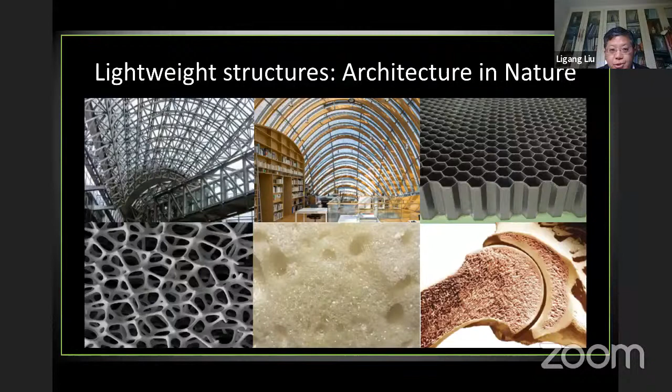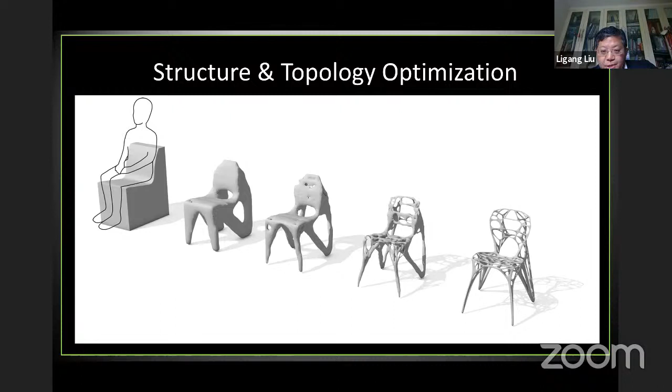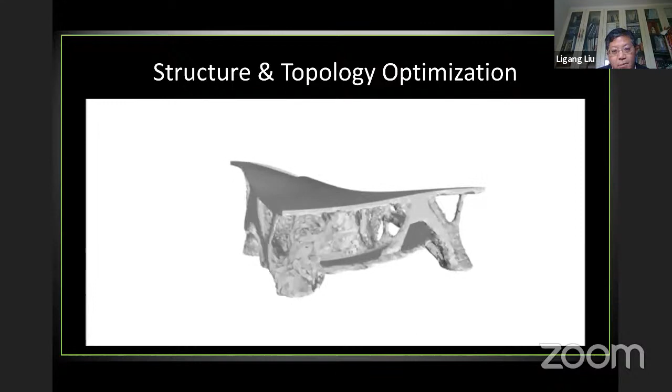Okay, so here is an example of structure and topology optimization. Given a chair that people sit on, we can reduce the material used in this chair. And you can see that with some technology, we can optimize the structure and the topology of the chair, as you can see here. So here is an animation which shows how the redundant materials are removed from an object like this one. As the optimization goes on, more wasted material can be removed, so that we can get the final result as shown here.

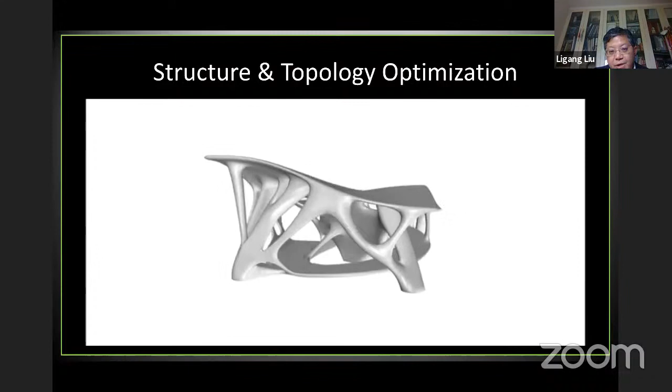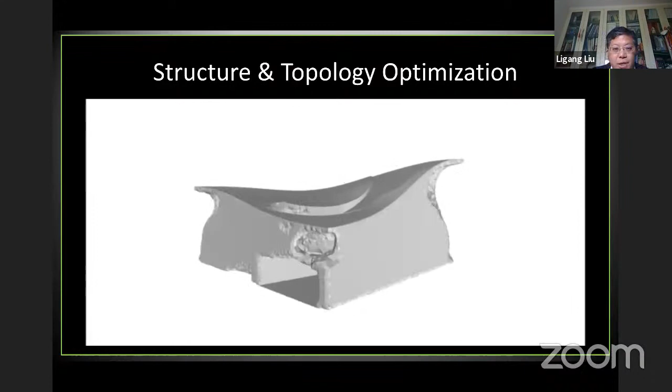And these objects can be very strong and stiff as well, because the optimization can satisfy different kinds of constraints with external forces, something like that. And here is another example showing how the optimization removes the redundant material in an object, and the color shows the stress or something like this.

Okay, and people have developed different kinds of technology for lightweight structure optimization. Generally speaking, there are three kinds of optimization: size optimization, shape optimization, and topology optimization. As shown in this figure, the left is the input and the right is the output. The size optimization aims to optimize the sizes, like the length or the width of some structures. The shape optimization wants to change the shape of the interior voids. And the topology optimization tries to optimize the topology structure inside the object.

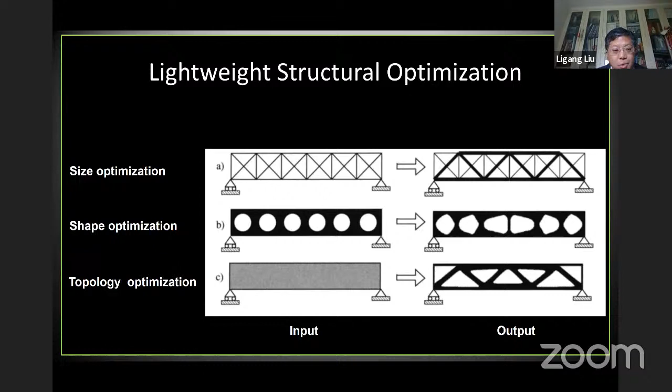So here is the general mathematical formulation of the lightweight optimization. As shown in this left figure, let me explain some notations here. Let me show the point. Okay, here is the Dirichlet boundary, so that means that the boundary here is fixed.

And here is the external load, so people can conduct some external forces over here. And all the other boundaries are free boundaries, so you can move the boundary or minimize the displacement of this boundary. And with some constraints, for example, here we have some fixed material, and we don't allow some material shown here. And then the other region is the free material region.

So generally, we have the constitutive models for some kind of special material, and we have the formulation like this. Generally, we have the cost function called compliance or strain energy cost function, and we have lots of different kinds of constraints as shown here. The first one is the stiffness equation. That means the object should be in the equilibrium state when the forces are applied.

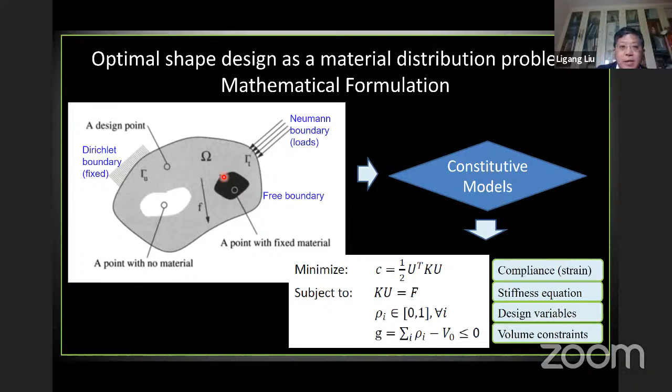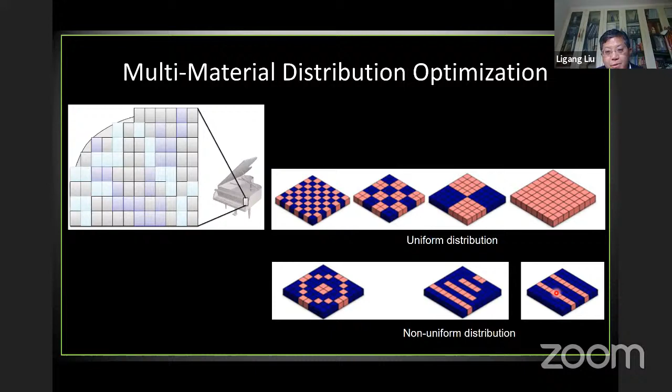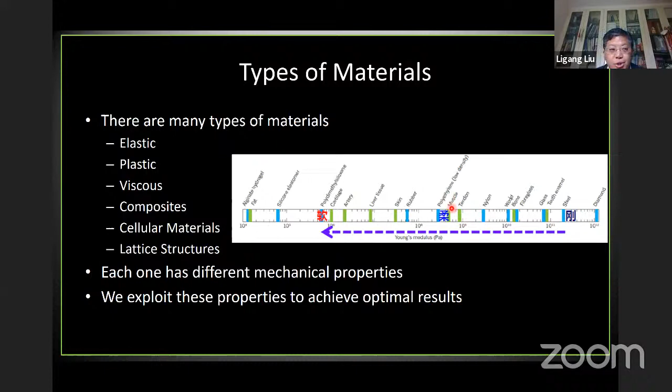Okay, in our real world, we have lots of types of materials, from elastic, plastic, and also some cellular materials, lattice structures, etc. Here you can see that the Young's modulus of different materials ranges from very minor to very large. So we have to handle different kinds of materials in the optimization, and each type of material has different mechanical properties, and we have to exploit these properties to achieve optimal results in our optimization.

So there are lots of challenges in this optimization. As you know, we use a very large number of finite elements, which we call pixels or voxels in 2D or 3D. And then we have a binary decision for each voxel. That means if we have a large number of elements, we have a huge space for searching the design results.

So people try to develop different kinds of technology to solve this complicated optimization. For example, we want to convert the discrete optimization to some continuous design so that we can use some high-level optimization methods like derivatives. And also we want to define some parametric structures with a very small number of design variables so that we can reduce the scale of this optimization, or we can find some objective functions with cheap derivatives, something like that.

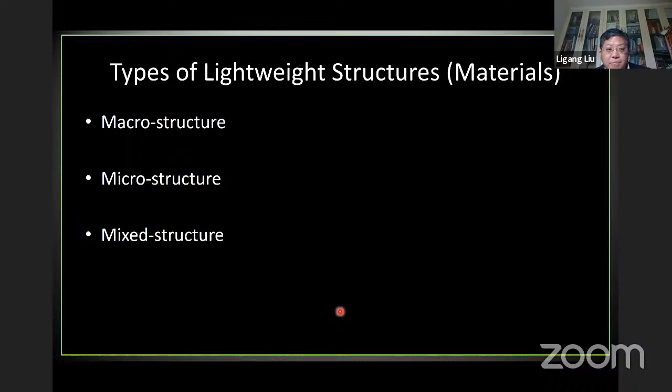Okay, so let me show some different types of lightweight structures here. From my point of view, there are different scales of lightweight structures like microstructure or some mixed structure. In some papers, we can also define some mesostructure. Okay, so this shows some particular parametric structures. People can use trusses, frames, Voronoi diagrams, or some rib-shell structures for lightweight structure design. And in these structures, we have different kinds of parameters.

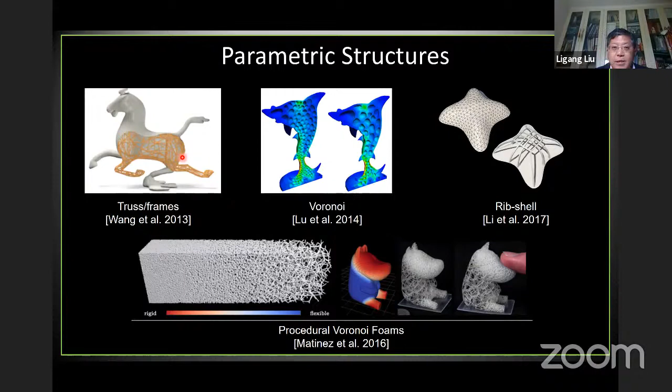For example, for this figure, the authors use frames. Each frame has its length and radius and the connectivity between the nodes, so we have a small number of parameters to be optimized. And this is another structure, which we call microstructures. People can define different elements of the microstructure so that we can compose all the microstructures for creating larger objects. And we can define different microstructures in the cells, and then we have different kinds of mechanical properties in these objects.

And people also use some mathematical functions like the TPMS. I believe that Linda will introduce the details of their work on this direction. And also we can synthesize some complicated structures from a given sample. This was coined as texture synthesis from 2D to 3D.

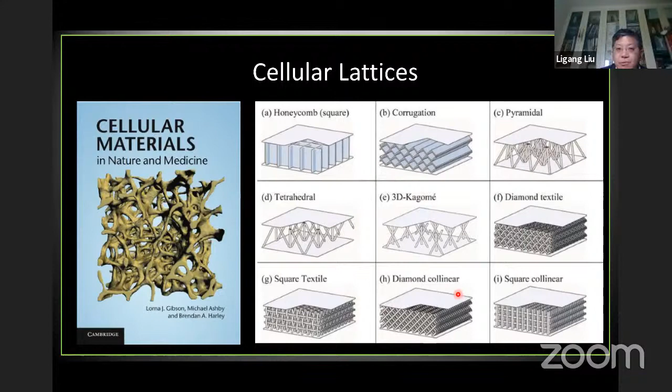And we have many other cellular lattice structures. So you can see that in material science, they have a book called Cellular Materials. And actually in material science, they have developed many kinds of cellular lattice in their community. And also you can see here, we have lots of solid foams. And also we have some composite structures.

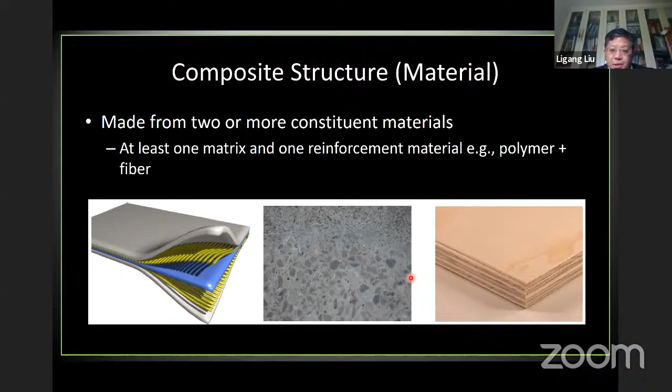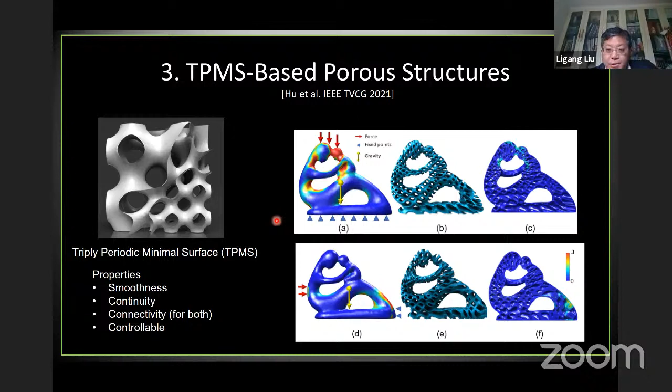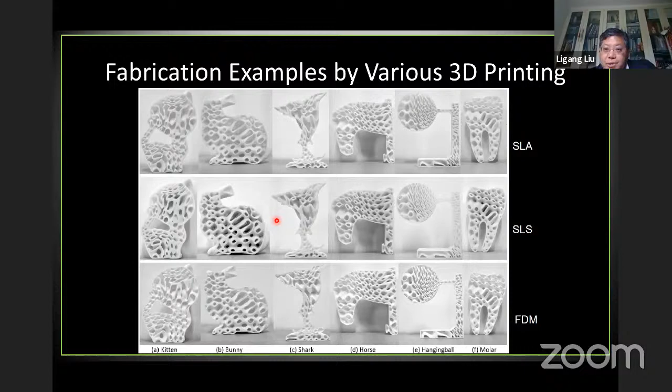In this work, as far as I know, we have developed the first mathematical optimization for this structure. TPMS has very good properties like smoothness, continuity, connectivity, and controllability. This kind of structure has been widely used in many areas, including engineering, medical sciences, and civil engineering. And here are some examples generated by our methods. This kind of structure is very nice and can be fabricated with different 3D printers like SLA, SLS, and FDM as well.

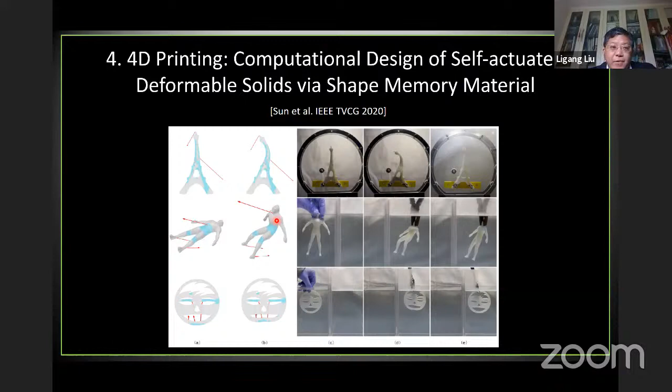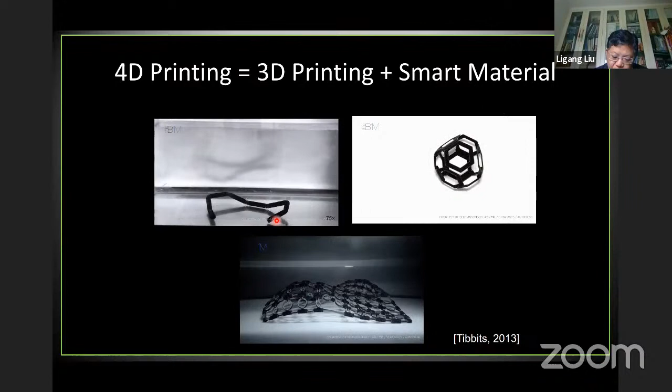And this is also our very recent work on 4D printing. 4D printing is very simple. It's 3D printing with some smart material. The smart material is a kind of stimulus-responsive shape memory material that can be deformed from its permanent shape to a temporary shape when heated with external forces applied.

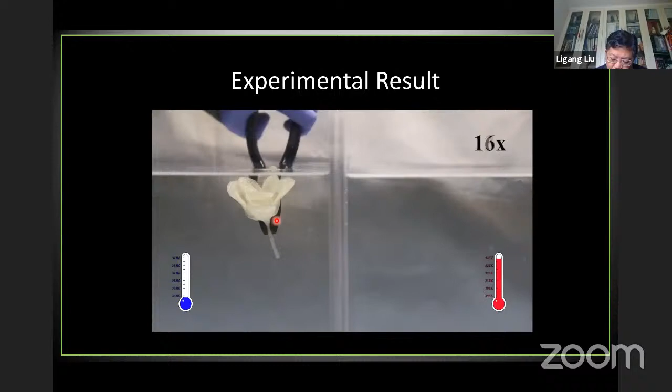And here is the example generated by our methods. Due to the shape memory effect, the object will keep the temporary shape when the environment temperature is decreased and the external forces are removed. Then the shape can turn back to the permanent shape after being reheated. With this property, we can optimize the mixture of the shape memory material and the elastic material to satisfy the user constraint.

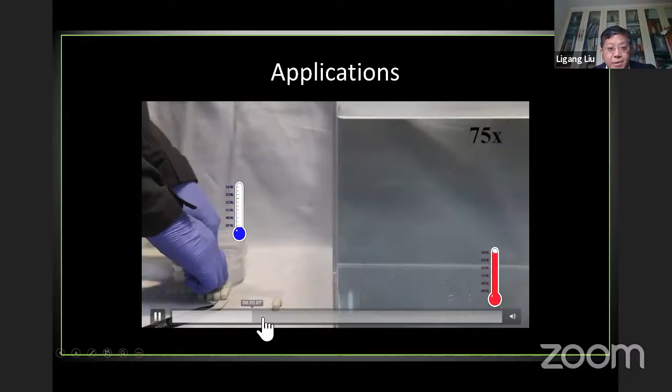And we have also developed some applications to validate this architecture. Let me skip the first application, and let us take a look at the second application. The grabber cannot grab the ping pong ball in its permanent shape. Then we can heat it and deform the shape of the grabber, so that the grabber can get the ball when it's heated.

Okay, so time's up, so let me make a very short summary of my talk. As shown in my talk, we have lots of different kinds of structures, like lattice structures. But there are still lots of challenges in this direction.

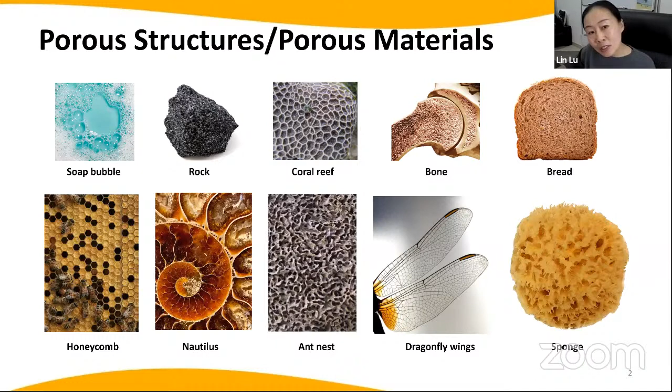But porous material has very highly developed internal surface that conveys specific functionalities. For example, we can see these porous materials in nature: the soap bubble, the rock, the coral, the bones, bread, sponge, etc. So thanks to the very nice physical functionalities caused by these highly developed pores, it has been widely utilized in industry for many years, actually. For example, you can see the corrugated board, heat exchanger, the sneaker insole, etc.

So actually, the physical properties include lightweight but strong, energy absorbing, large range of elasticity, high heat exchanging efficiency and so on. And it's also applied for various materials like paper, metal, plastics, ceramics, etc.

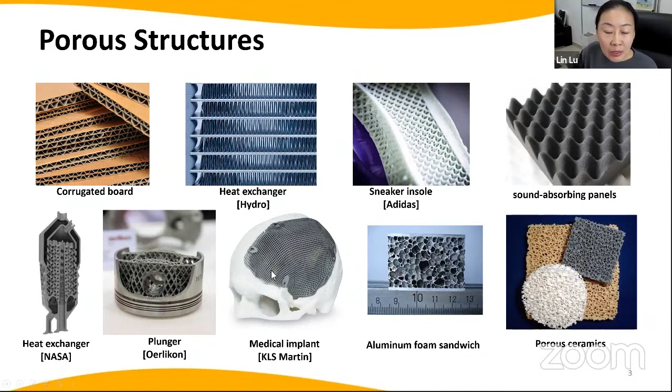So let's look at the features of porous structures. Depending on whether the cells are isolated from each other or connected with each other, they can be divided into closed cell porous structures or open cell porous structures. Depending on the direction of the pores, we can group them into isotropic porous structures or anisotropic porous structures.

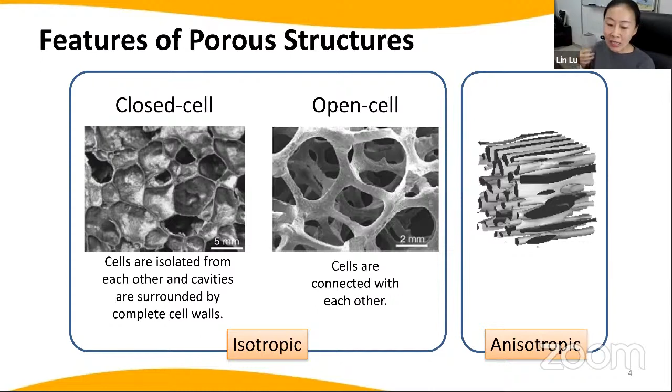So since we know that there are so many beautiful physical properties for these porous structures, our problem is how to model these porous structures such that they can convey these physical properties. So let's look at porous structure modeling. If we consider the modeling objectives from the aspect of functionality, we want controllable anisotropy, we want controllable porosity, and of course we want target mechanical properties as we have seen in the last pages.

But we also need to satisfy the printability constraints. For example, the solid parts need to be connected, and if the pores are connected as well, they will be very friendly for many powder-based 3D printing techniques.

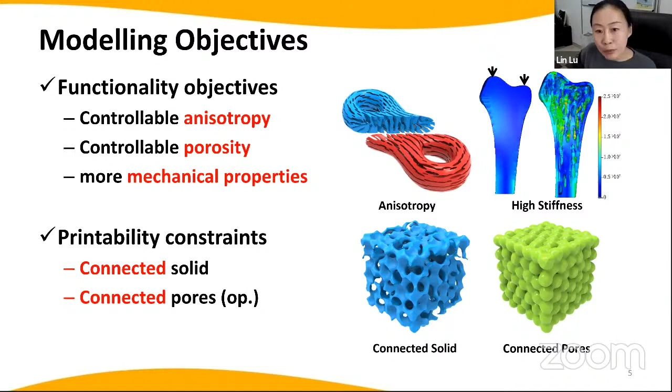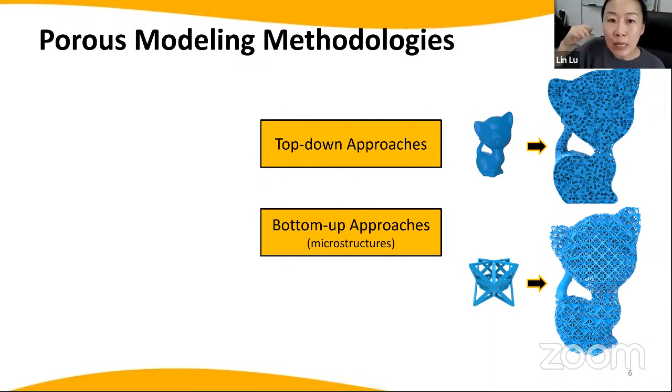Another group of methodology is the bottom-up approach. We start from a predefined optimized microstructure in a regular form, for example this one here, and we fill the given space with this kind of microstructure. This group of approaches is developing very fast. So in recent years, researchers also combine the pros of the two different kinds of approaches. That is a two-scale approach, which benefits from either side to build high resolution structures with very reasonable computational cost.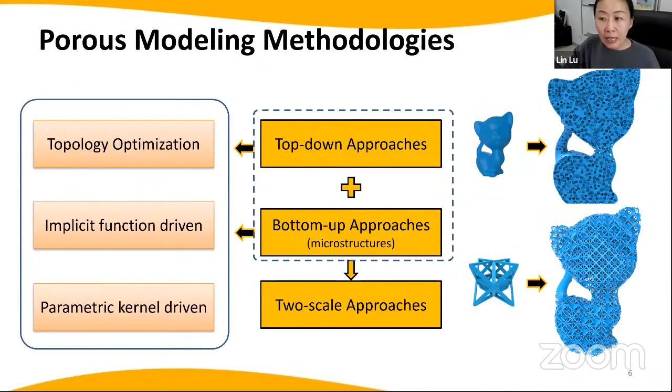Okay, so from another criteria, if we consider how the structure is represented and how the optimization is performed, I also group the current methods into three groups: the topology optimization method, the implicit function-driven method, and the parametric kernel-driven method. So next, I will briefly introduce the literature following this category.

Okay, so first we can see topology optimization, which has been a dominant method for years because it builds the constitutive equation, the fabrication constraints and other physical constraints together into an integrated equation such that we can directly solve it. The left part is the top-down approach, and the right part is the bottom-up approach.

So we can see that researchers have now put effort into combining different constraints, like the local volume ratio and the directionality of the structure, in topology optimization methods. As well, topology optimization can also be applied at the microstructure level, such that they can have optimized physical properties as long as they have very strict boundary conditions.

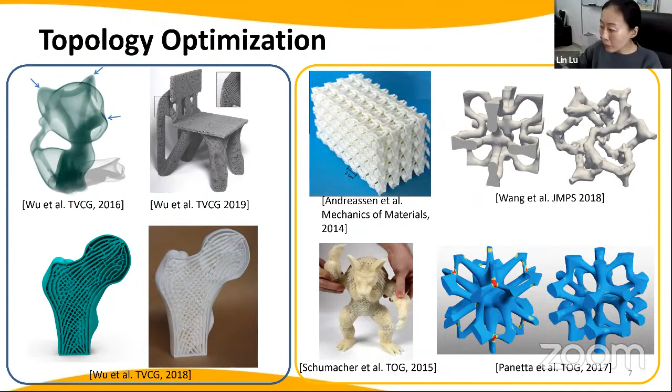So another group is implicit function driven. Still, the left part is top-down, and the right part I label as top-down. Sorry, as bottom-up, please switch it. So this work was just mentioned by Ligang. This is the very latest work with TPMS, and in their work they optimize both the size and the topologies of the TPMS to achieve high stiffness. Later I will also elaborate on the TPMS method.

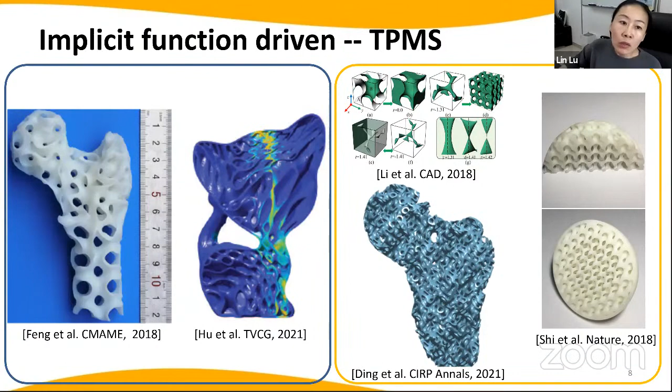So another is parametric kernel-driven methods. The goal of the parametric kernel-driven methods is to use the parametric form to represent the huge number of variables of the voxels or other finite elements in topology optimization, such that the variables in the optimization are a limited number, and the optimization can be performed fast and rapidly.

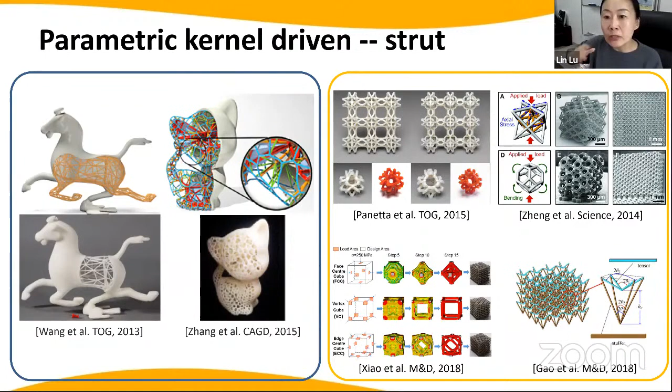For example, Ligang has shown the frame scheme work, a very impressive one, and more and more microstructure design works on the right part. They basically make the strut in a parametric form, and then they can optimize the strut with a limited number of parameters such that we can achieve the target shape.

The Voronoi diagram is also a very frequently used option to build the internal structures in the shape. For example, this is our work in 2014. We use the Voronoi diagram, and Martínez et al. have a series of great works on Voronoi foams. They use either the struts of the Voronoi foam or the walls of the Voronoi foam. This kind of Voronoi foam is a stochastic structure, and it's a very typical top-down approach.

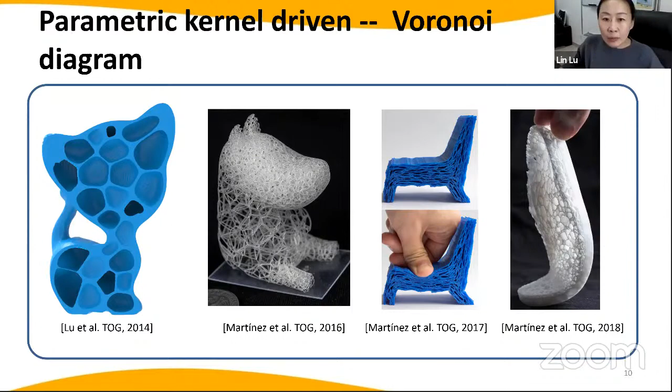Okay, so talking about the parametric kernels, there are many options. For example, we can use spheres. We can also use the Michell truss as the parametric element. And if we're considering the self-support property, we can also use rhombic structures. There is an increasing number of researches on different parametric kernels to optimize internal structures.

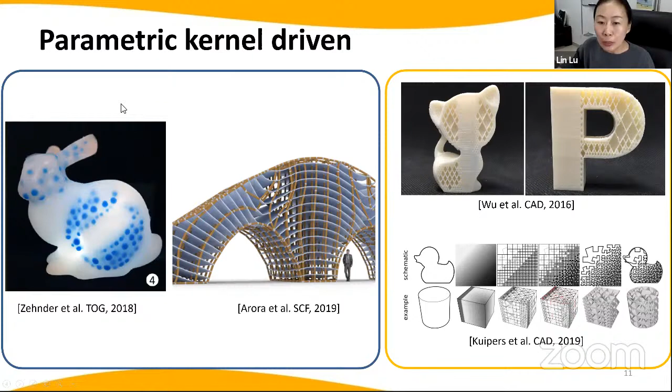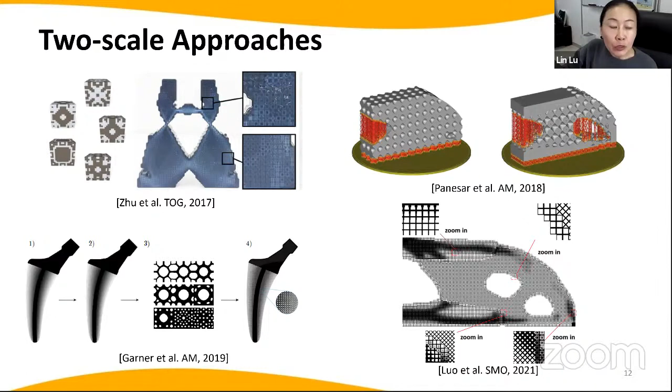As I just said, both methods, either top-down or bottom-up, have their own pros and cons. So the two-scale approach is actually combining the pros of each approach. We can optimize the material distribution at the coarse level, and then we can fill the microstructure to obtain very specific physical properties with high resolution. Okay, so this is the brief review of the current work, and from now on, I will introduce some details.

Our first work is the honeycomb one. This is a typical parametric kernel-driven one. Today I will talk about the TPMS method and the kernel-based method to produce the organic porous shape. Okay, so let's first look into this project. TPMS is very appropriate for microstructure design or internal structure design. It has a very simple form, and it has smoothness and double connectivity.

So we can see there are variations of the different TPMS forms. We take the most simple one, called the P surface, that is the primitive TPMS, as an example. It's actually an implicit function. This function is triply periodic, that is, it can grow infinitely in the three orthogonal directions.

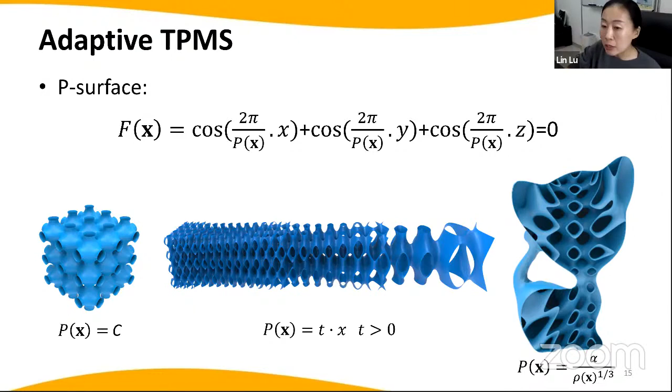So we can see from this Kitten model, TPMS is connected, but when it is filled in a given shape, it needs to be clipped to fit in the given shape. The clipping actually causes troubles for these structures. For example, here we can see that it might be turned into multiple components after clipping. So we need to figure out a method to make it locally connected, such that we have one component. This is a printability constraint, that is, the solid part needs to be connected.

So we can use very simple operators. We apply a Gaussian function on the periodicity function, such that we can locally increase or decrease the periodicity. Usually we decrease the periodicity such that they are denser and they can get connected. So this is the detail, and we use this Gaussian kernel to tune the periodicity function.

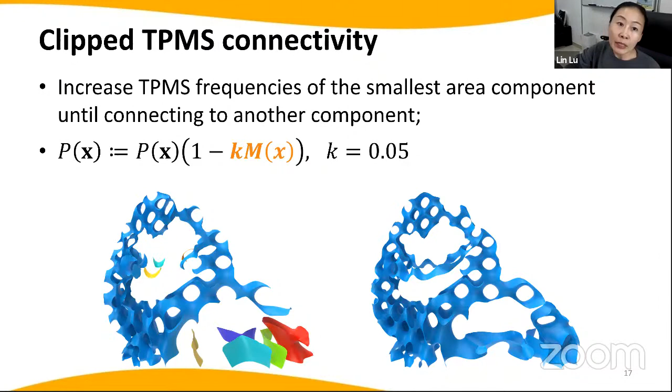Okay, so after tuning this periodicity, we can get a connected component of this TPMS part. Okay, so considering the fabrication constraints, self-supporting is another constraint. That is, for most fabrication techniques, we want the object to be self-supporting. So self-support is a very well-known criterion that is defined by the subtended angle and the tolerance area.

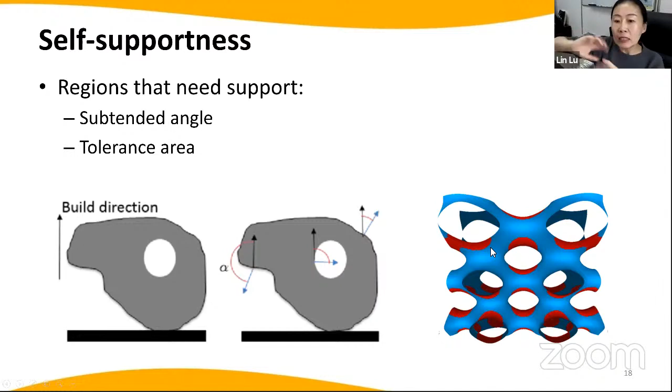So we can see that for this TPMS structure, the red parts are not self-supporting. So we need to optimize it locally such that they become self-supported. This is also very simple: we can just add a parameter function gamma x along the printing direction, that is the z direction here, and we can increase this z direction's amplitude, such that it can be locally tuned and fulfill this self-supportness constraint.

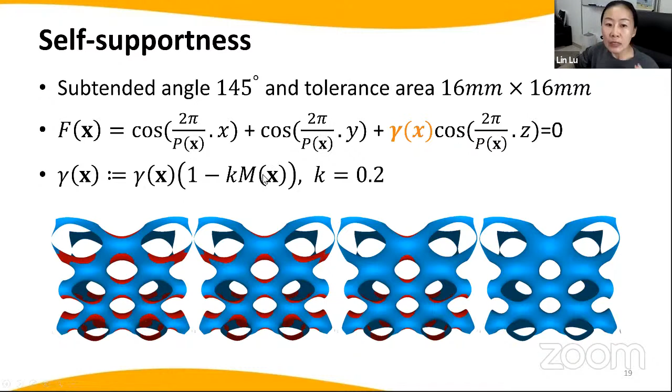Okay, once we have these small bricks of the TPMS, so we get a connected one, we get a self-supported one, we can consider another thing: how to utilize the very nice properties of TPMS. Because TPMS is really smooth, why not build a channel of TPMS? That is, we can simply compute the offset of the TPMS, and we get a channel that is smooth everywhere, and it can guide the fluid through the channel.

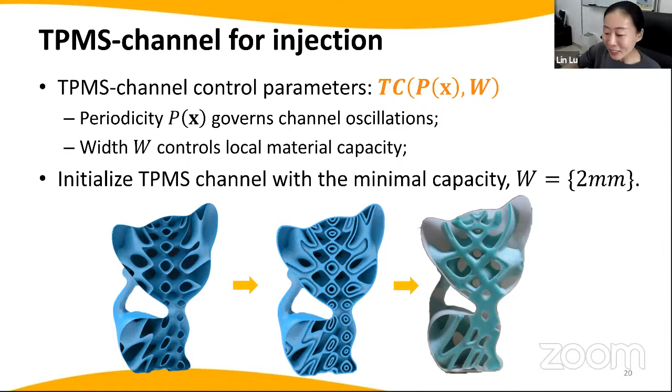So it's very simple to compute because here we use the implicit function. We only need to change the value of the level set, and also need to be careful with the offset such that there's no self-intersection. So once we have this channel, it will be very interesting to consider how to use this channel. So we choose to inject another material in the channel such that we can combine 3D printing and injection together.

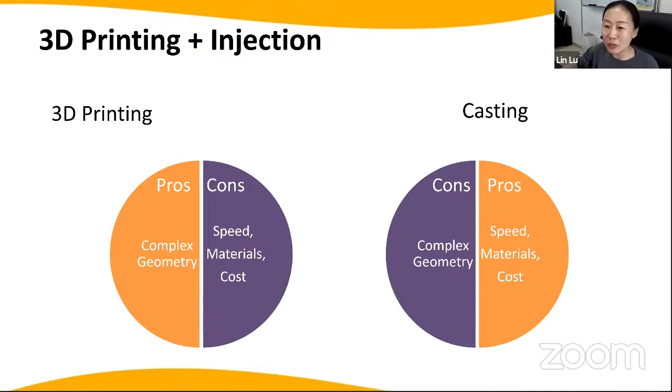So here is a really interesting part, so I want to say a bit more on it. 3D printing is very good at printing complex geometry, but it encounters problems of low speed, limited choices of materials, and relatively high cost. But casting or molding has the very opposite cons and pros. That is high speed, a large variation of materials, and the cost is relatively low. So why not combine the pros of both fabrication techniques together to propose hybrid fabrication? So this is our idea.

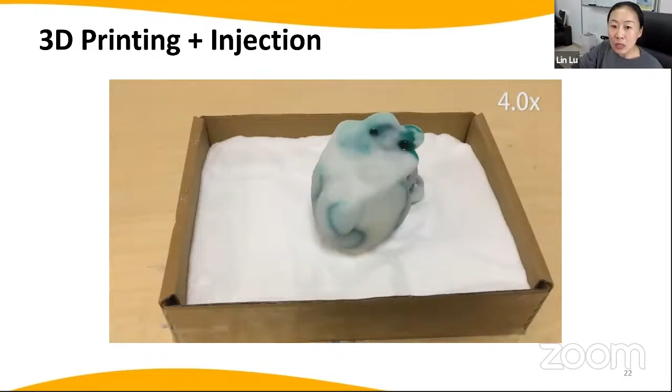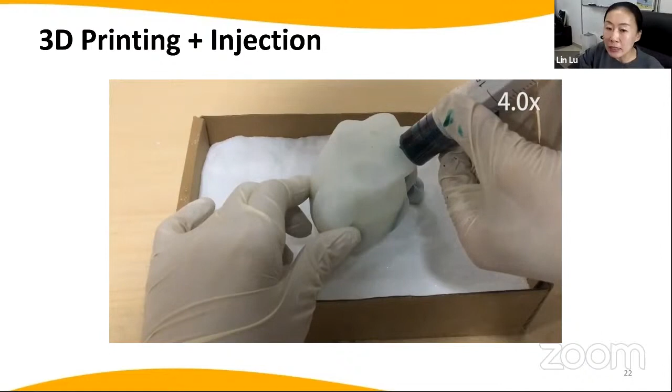So this is a bunny model, and we are injecting the epoxy resin in the bunny model in the pre-computed TPMS channel. So it's very fast, and the epoxy resin solidifies at normal temperature after 5 minutes. So it's super fast, and we get the solid one. Okay, so this is the idea, and since the TPMS channel is one component, and it's self-supported, it can be easily fabricated in advance, and then we inject the second material.

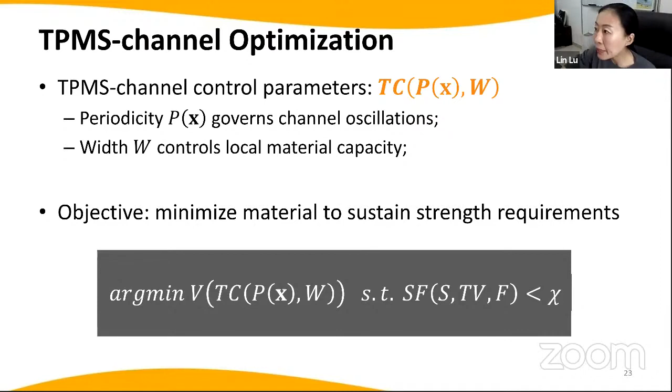Okay, so we formulate the problem as a TPMS channel optimization problem. That is, we want to optimize the TPMS channel's structure such that we can achieve a high strength to volume ratio. That's shown here. So the two variables are the periodicity px and the width. Actually, the width is a local parameter everywhere, so we can control the local width of this channel. Okay, but let's see the functional space.

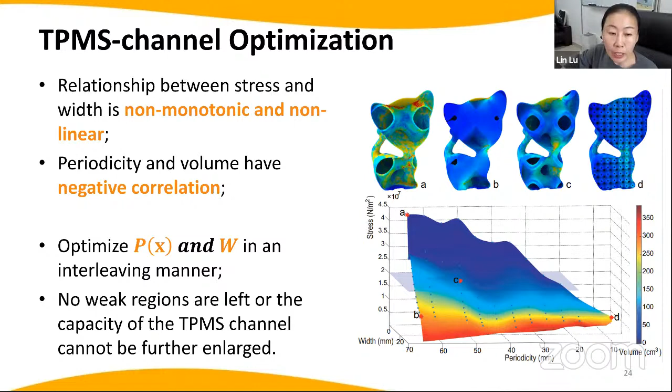Here for samples A and B, the periodicity is the same, and C has a lower periodicity, and sample D has a very dense periodicity. We can see that the correlation is not very clear, it's not monotonic, and the whole design and optimization space is nonlinear. So we need to very carefully design the optimization strategy.

Okay, actually we employ the interleaving method. We optimize the width and the periodicity in an interleaved way. For the width, it's a local tuning. So here we only need to be very careful to avoid self-intersections, and we omit the details.

And for the periodicity optimization, it's kind of interesting. For example, here for strong regions like these regions in the box, we want to increase periodicity such that the material used is lower. That is, we reduce the channel capacity because we do not need this much material to be injected. For weak regions, we want to decrease periodicity because here we want more injected material to fill in. So this is a very tricky part.

So here is the optimization process. Usually we need one, two or three rounds for adjusting the TPMS frequencies. That is called the periodicity optimization, this P optimization. And we use a few more iterations for locally tuning the widths of the TPMS channels, such that they are tuned at a fine scale.

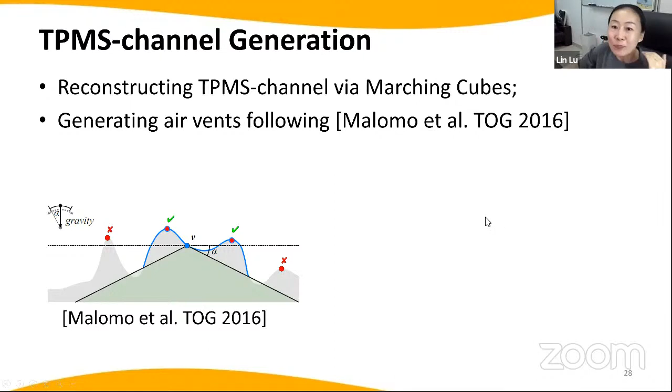So for this dragon model, we choose the non-salient part to dig the hole to inject the material. Here the red arrow shows where we inject the material, and the two green arrows show the air escaping holes.

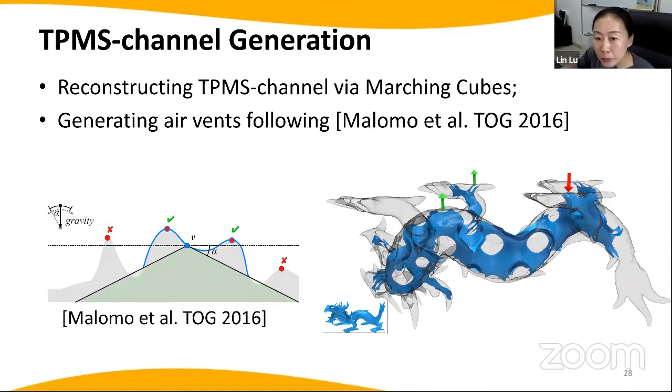Okay, so another interesting part is the injected material. As I said, there is a really large range of options for injected materials. In the video we showed just now, we used epoxy resin to fill in, which is very frequently used by DIY makers at home. But we can also add carbon fiber to the epoxy resin, so that we have enhanced strength.

For example, if we use PLA, a 3D printing material, the yield strength is only 49 megapascals, and epoxy resin has a higher yield strength. But if we consider 10% carbon fiber in the resin, we can get two times higher strength in the new material. But these experiments need to be very careful. We have a collaborator from material science, so it needs to be very careful, very protective.

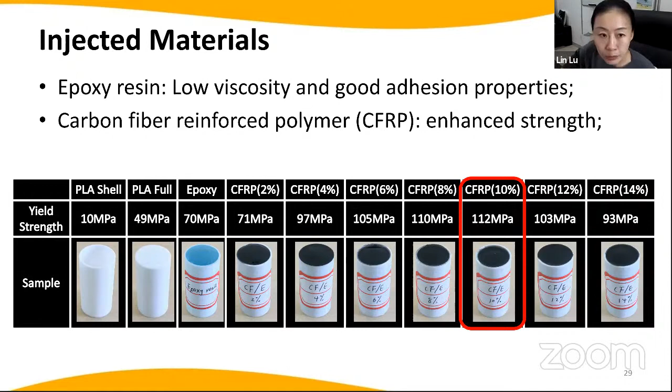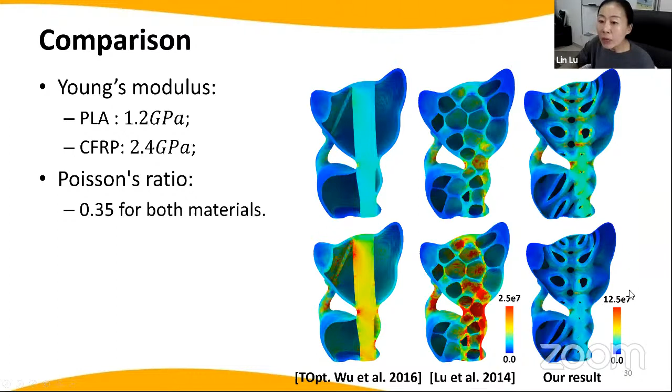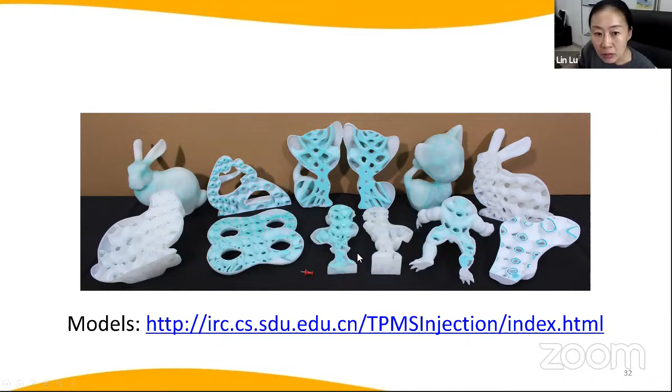Okay, so if we consider the two different materials here, this is the Young's modulus of PLA, and for the carbon fiber resin it's double that of PLA. They have the same Poisson ratio, and this is just a simulation, and we can show that our results can sustain very high external forces. Okay, so there are more results, and the models are on our project page.

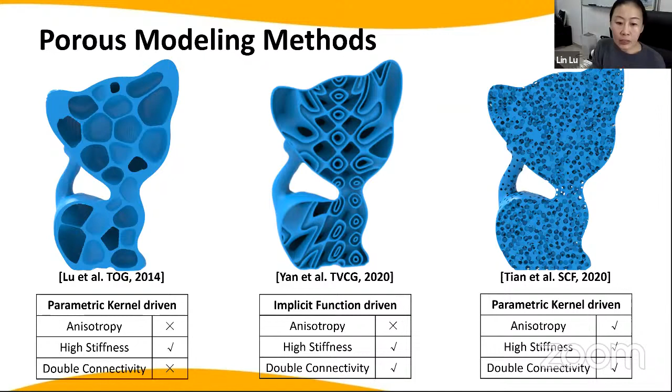Okay, so this is the middle work I just introduced. I didn't talk much about the details of the optimization of the structures, and for the latest research progress, I really recommend Ligang's work just published. They have a better optimization formulation for the TPMS structure. Okay, so I will talk about the next one.

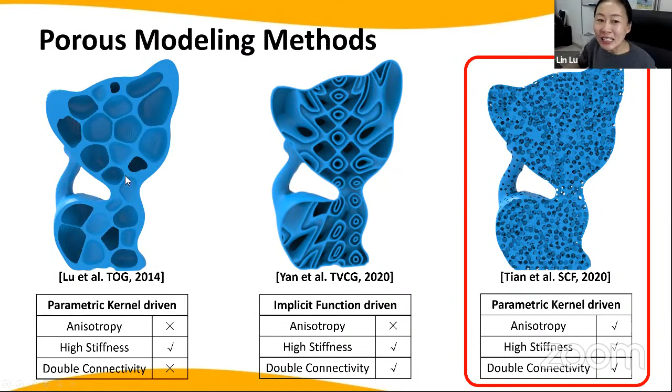That is this one. We can see that it looks very different from the first two kittens. It's more stochastic, more organic, right? That's our target. So let's look at a real porous structure. This is foam, just natural foam.

So our question is, most works take the solid part as the optimization element, to present parametric forms of the solid part, or to use implicit functions to represent the solid part. But why not represent the pore? Then we can represent the pore shape and the pore distribution, and we can really do the biomimetic thing.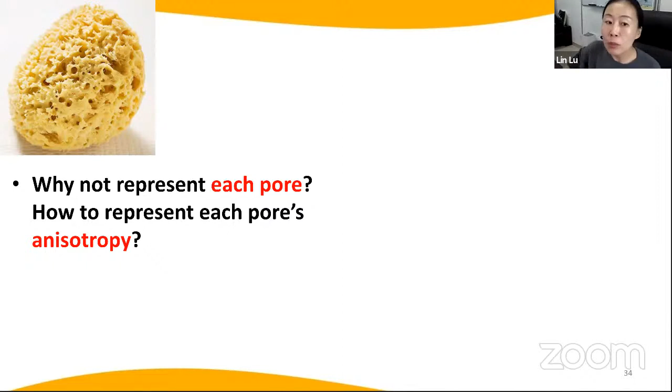Okay, if we can, then how to represent each pore's anisotropy is the question. Another question is how to guarantee the double connectivity, as we showed in the TPMS work. So for the first question, we propose a tensor-based Gaussian kernel to represent the pore instead of the solid. And for the second part, we really need a guarantee, so we employ the Morse-Smale complex to enforce the double connectivity.

So if we want to represent the pore with directions, a 3D tensor is a good choice for representing the pore shape. It's like this figure. A 3D tensor has 3 orthogonal principal directions, and if we apply it to a sphere, we get an ellipsoidal shape.

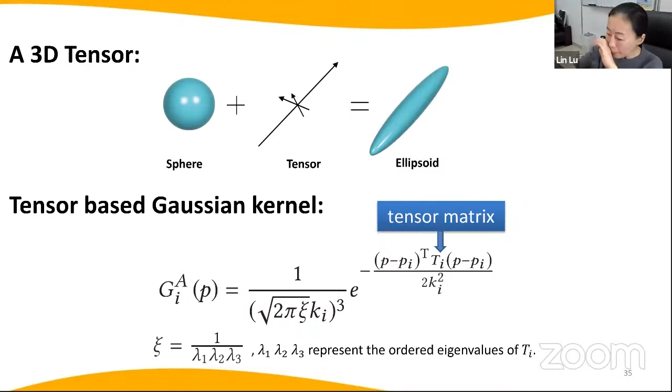So the problem is how to find an optimized level set value, the distributions of the kernels, the tensors of the kernels, and more parameters.

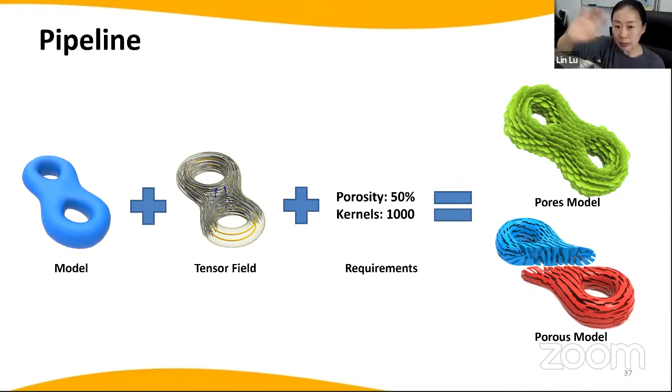So this is the idea. Actually, it's very simple if we consider this tensor-based Gaussian kernel, because we only need to consider the tensor matrix. So I will emphasize how to guarantee the connectivity. The connectivity means both solid connectivity and pore connectivity.

Here we consider the connections of the pores, but which is the effective and efficient connection criteria to measure the connection between the pores is a problem. So here we employ the Morse-Smale complex, which is really a good one for representing the topology connections.

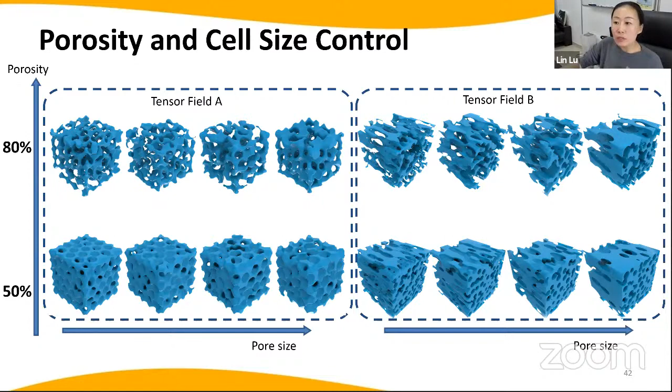So we can get the results, and we can control the porosity here. For example, the upper row is 80% porosity with different tensor fields. And we can also control the pore size. Our motivation is to compute biomimetic porous structures, that is, organic porous structures. I can also use this modeling as the kernel design with some given tensor field. We can achieve various pore shapes, and then we can get different results.

Also, we consider how to model the real bones as the porous structure. Here I mention that the implant does not need to be biomimetic. As we can see, many regular implants have already been used in medical applications. We consulted with doctors, and it did not need to be organic. So here it's just an example to show the modeling result. For this kind of vertebra model, the porosity is usually 60%, and the pore size is 0.5 millimeter, and we get this result.

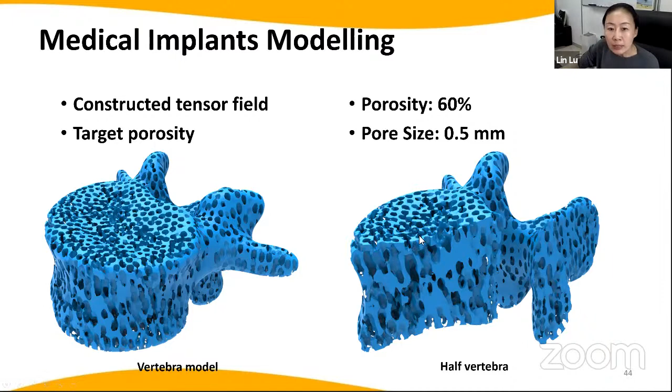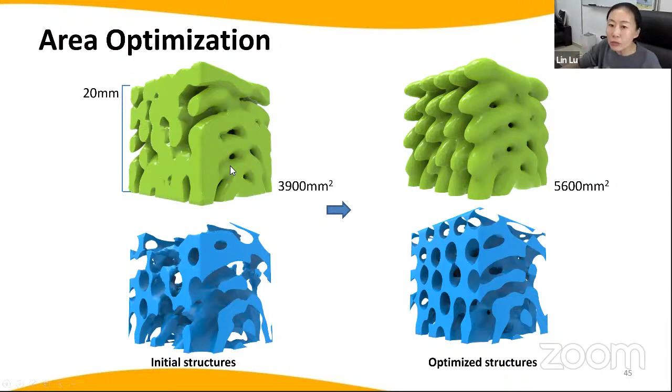But we can also tune the objective function. We can optimize the internal area, such that we get higher heat exchanging efficiency. So we can see that all the optimization is working on the pores, that is, on the Gaussian kernels. So that's really the basic idea.

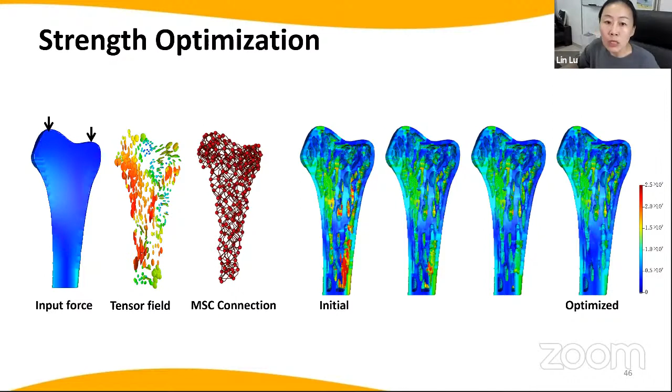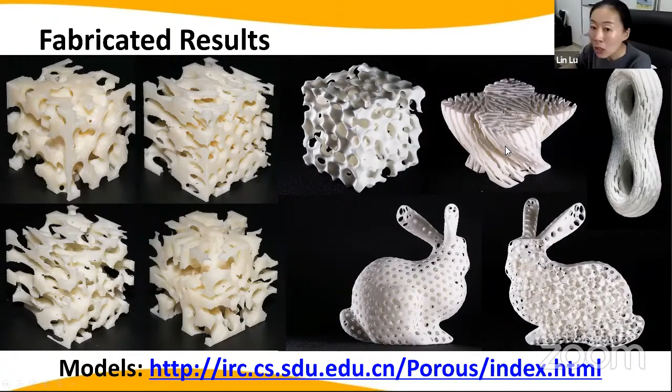Okay, so we have some fabricated results, and models are also online. Okay, so as a conclusion, I just introduced two of our recent works. One is the implicit function driven as the middle one, and the other is driven by the parametric kernels. But the kernels are used to represent the pores. All of the three methods are top-down approaches. That is, we optimize structures in a global manner in the given shape.

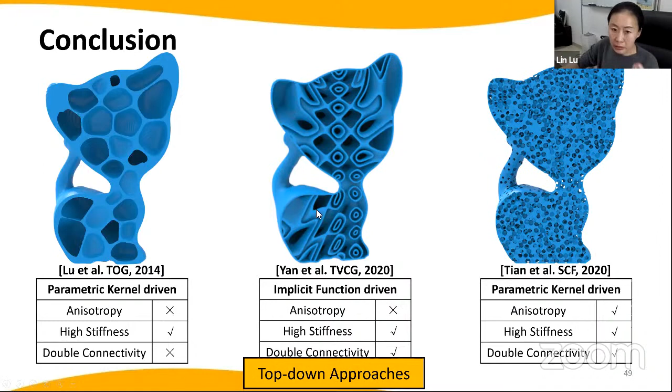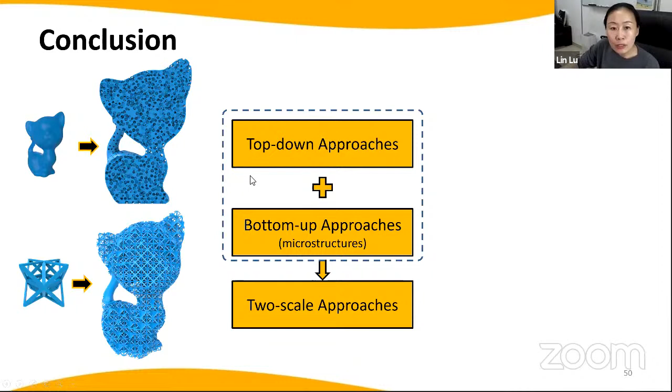So here I want to add a little bit of comments on these different kinds of approaches. For the top-down approach, I think it is coupled optimization of geometric structures and physical properties in a global design space. And it mostly needs high computational cost, as it is a coupled optimization. We need to consider the simulation, the finite element analysis, and the structure parameters.

So I don't think it would be a good choice for a high resolution of the structures like microstructures. So microstructures as a bottom-up approach, its feature is decoupled optimization, and it's feasible for high-resolution structures, and it has high generalization capabilities as a new material, so-called metamaterial.

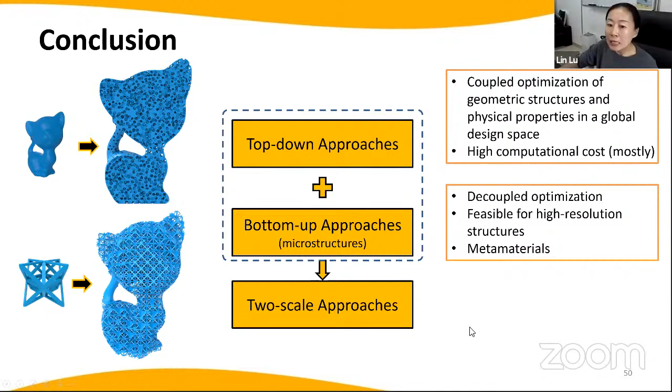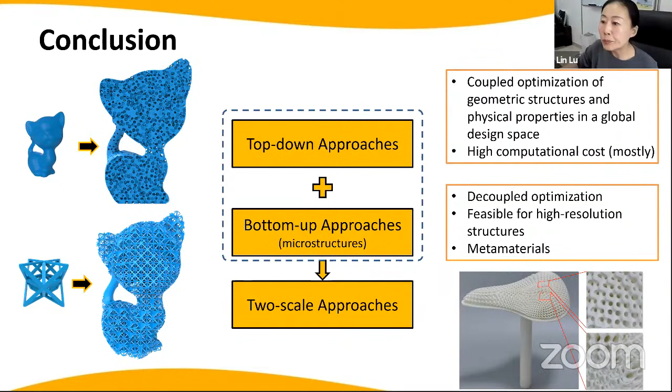Okay, so still, I think the trend is to combine the top-down approach and bottom-up approach as the two-scale one. This is also our current interest. As shown here, we are really interested to make the structures very dense and to convey really different material properties. We use just one single material, and we can convey a very large variety of material properties. So that's our goal.